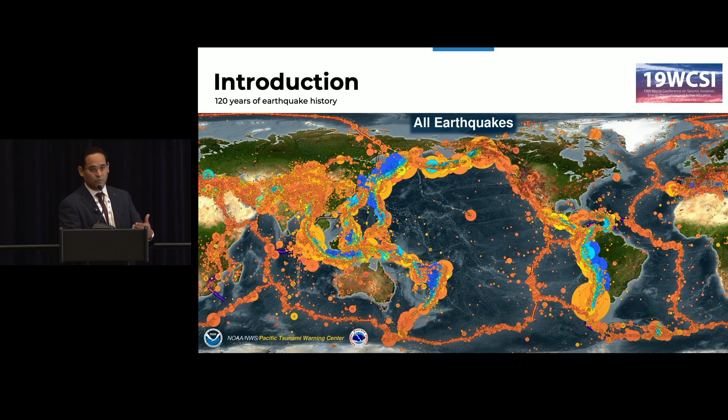So I'll go through these projects, not from the very technical side - I have the details of all the projects, if you want, please let me know. But in the time we have, we're just going to look at what type of bridges, what type of structures, and the way they have been solving these projects.

Of course, these are the most popular technologies. Fortunately, in Mexico and Latin America in general, there are plenty of manufacturers now providing solutions, which is also good for competition. I emphasize this point because cost matters for Latin America. It's a region that doesn't necessarily have the means to use technologies in the best of our abilities, but I think it's changing now, because it's a product that's more affordable for the markets, and I have some evidence of that.

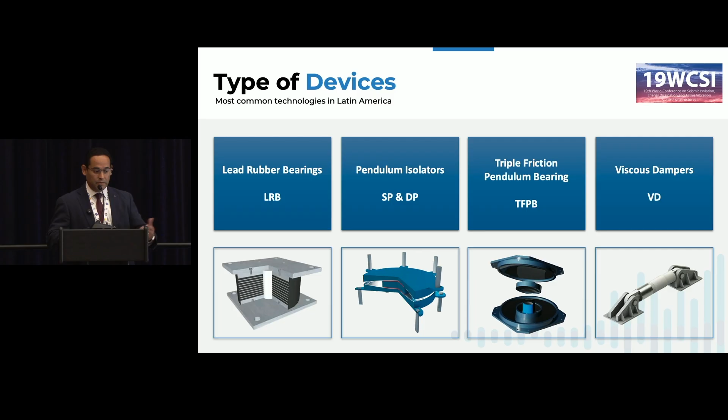There are different technologies, different companies, different manufacturers. Most of them are now in Latin America pushing for this, and it's amazing. But of course, we need to be careful in the way we do it. These are just as a reference.

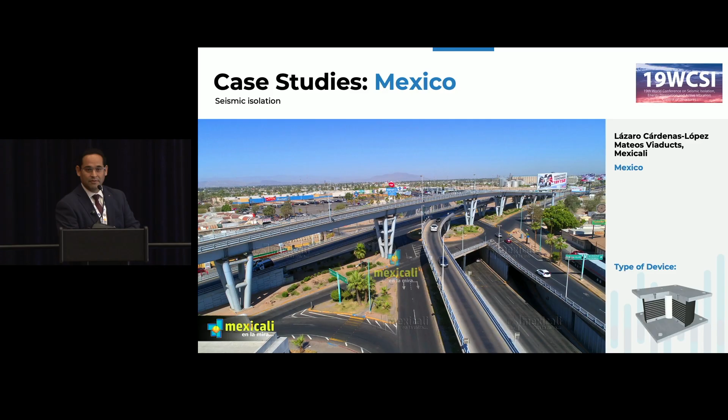Some of the case studies I want to show you - I'm going to start from the north to the south, not because I'm Mexican putting Mexico first, it's just in the north. This, for example, is a viaduct that has been there for almost 20 years in the north of Mexico, in Mexicali. It's equipped with elastomeric isolators. It's been there for a while.

There have been some issues in terms of seismic joints, not only the expansion joints, but the proper joints for seismic isolated bridges. I think it's a topic we need to be very careful about because we lose continuity of the operation of the structure if we don't have proper joints. Sometimes we neglect that from the actual design, and it's important to keep this in mind.

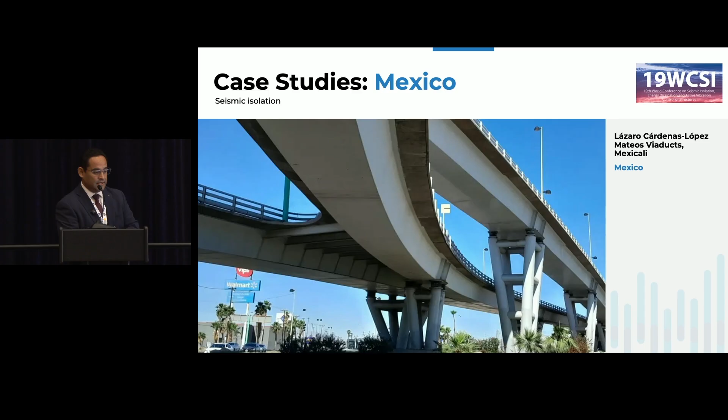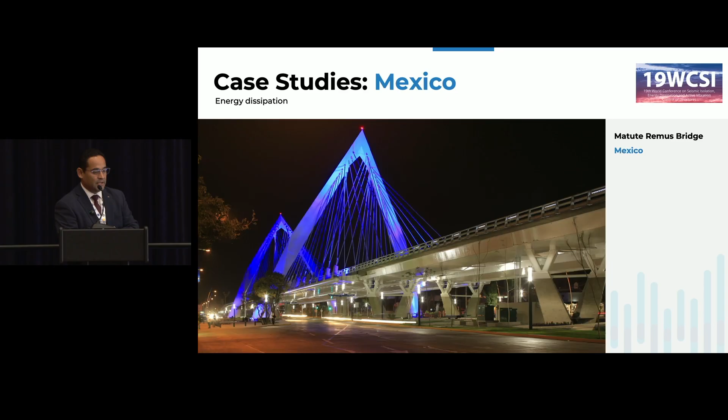This project has a little bit of an issue. There are other projects like this in Guadalajara, a big city in Mexico. This one is equipped with dampers for quite some time. You can see a little bit under the structure, the four dampers connecting the superstructure of the bridge. It's quite interesting, a beautiful bridge in the city. Very few people know it has dissipation devices underneath, but it's quite an interesting application, again in a beautiful setup.

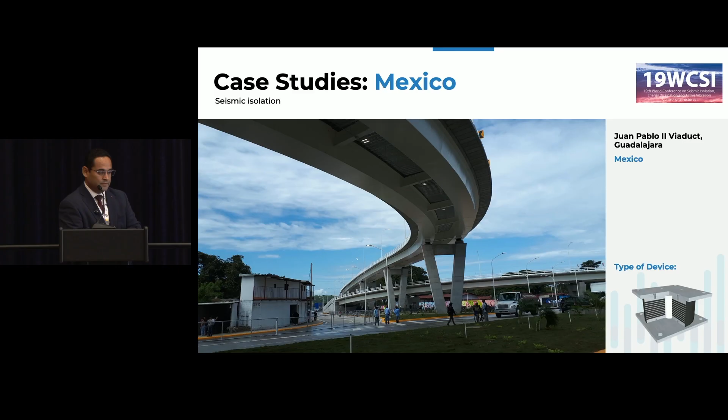Another similar bridge, also in Guadalajara, very similar to the one in Mexicali, also with elastomeric isolators, steel structure, as you can see. Now the piers are concrete, but more or less in a similar path as the other one. You see a little bit there also the devices.

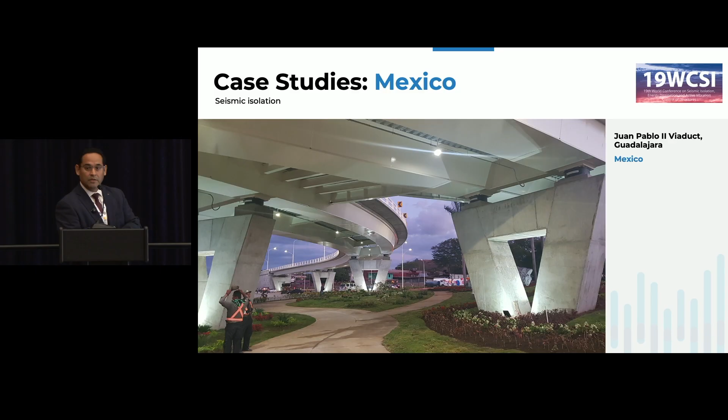Guadalajara is at the moment not the place—actually it's happening quite often that they think they don't have that many earthquakes. Probably you've seen that around the world a lot, and they do have earthquakes, but they don't remember that well, unfortunately. But they do have seismic isolated viaducts there.

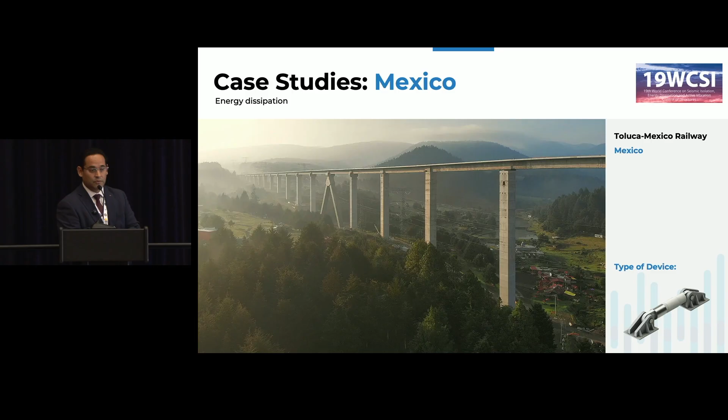Now, with the introduction of the railway industry in Mexico, which has been left aside for many years and is now being pushed by the actual government, we have viaducts like this for railway bridges, and these are equipped with energy dissipation devices, which are quite impressive. You'll see the picture there. So this is now another reality in Mexico.

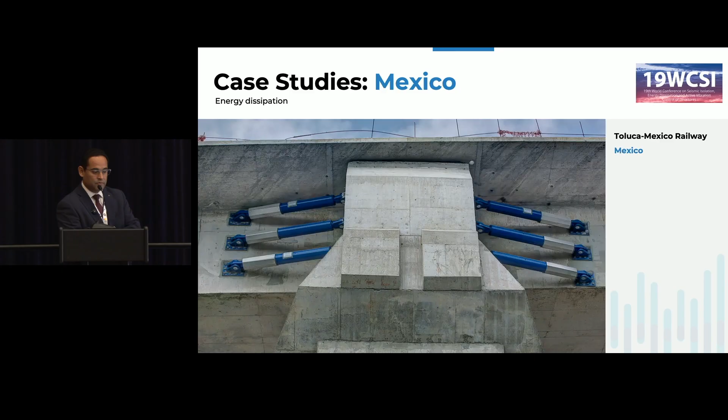Now, of course, it has a lot to do with the globalization of knowledge—a complicated term. Many of the companies designing these viaducts are coming either from Europe, the US, or Canada. So of course the know-how exchange is happening, and the manufacturing capabilities come from other countries for these kinds of devices. But now it's a reality in Mexico, and it's happening more often.

You see there the sizes of the devices—it's quite an interesting project, quite impressive, for a country which is not so familiar yet with devices, but it's interesting that we're jumping into that now. Especially in the previous presentation, you saw the importance of testing. That's when Latin America, and everything you've seen here, becomes a bit of a challenge because we don't have a proper testing facility in Latin America yet.

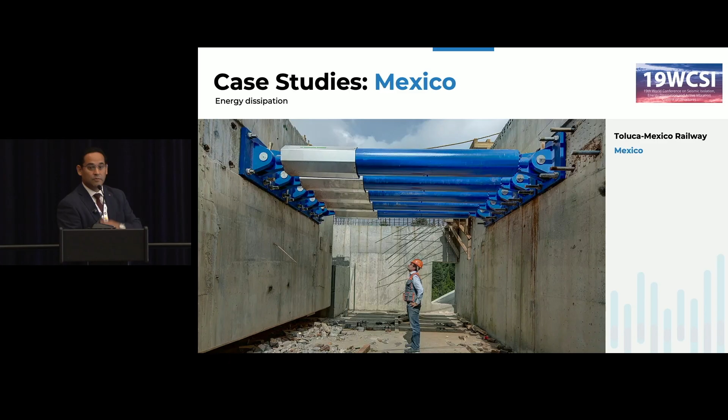So all the projects you've seen here, most of them have been tested in Europe or in the US, and that's normal—we can afford it at the moment—but the reality is we need to have in-house capabilities in our countries to properly judge if we're doing things the right way with the devices.

Another project, this is a precast structure. It's a viaduct in the city of Puebla. It has 1,400 elastomeric isolators, type LRB. So it's a massive project, quite long—13.5 kilometers. It's quite an emblematic structure.

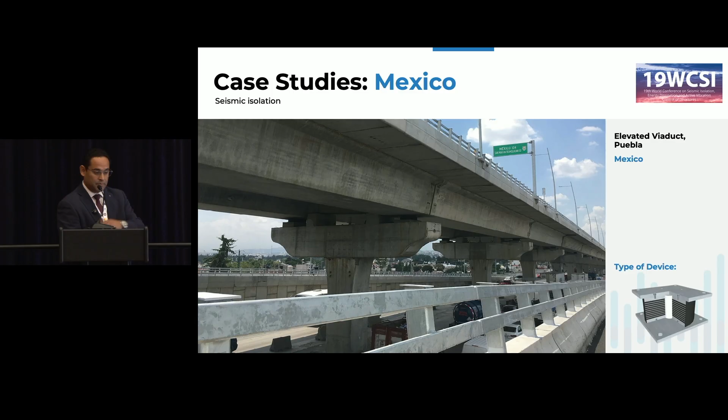Again, there are many things that need to be checked, but in principle it's working in a city that requires this. We had an earthquake in 2017 in Mexico that reminded us there's plenty of things to be done. The structures with seismic isolation or energy dissipation in Mexico City at that time performed extremely well during the earthquake. That's another reminder that these technologies work, and work well, and we need to continue properly with the proper studies, developing their use.

You see some of the pictures—that is quite long, again 13.5 kilometers, quite a massive structure. There you have another view of the viaduct from the top.

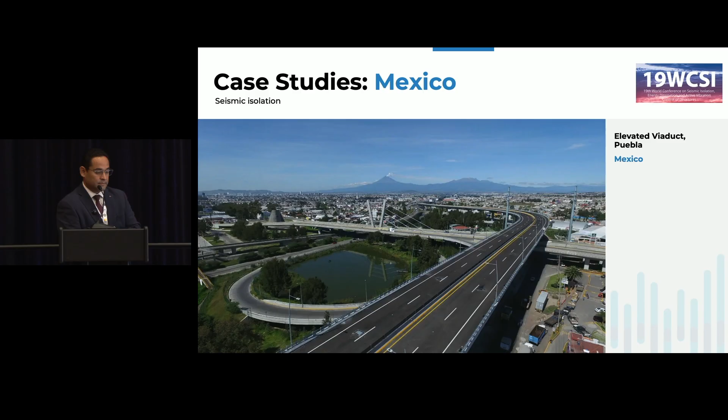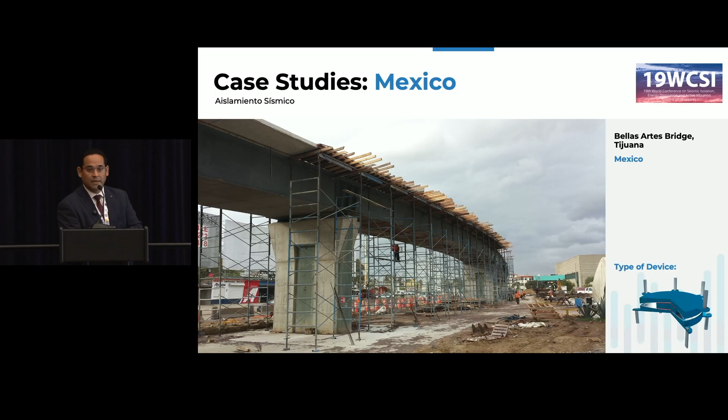And one more—you saw some big bridges, but I always want to emphasize that we don't need to focus only on big bridges. I was so surprised that Caltrans is also thinking now about having this focus on normal bridges, not the fancy ones, not the big ones, but the ones that serve the most people in the cities. And now it's happening. This bridge is in Tijuana, the city next to the US, and they have this overpass, a steel structure, now equipped with pendulum isolators.

You see a little bit there the pendulum, with special care on the seismic joints. They focus also on the proper joint that will allow the movement. If I recall correctly, the movement is about 300 millimeters in any direction. Plus the fact that you have a pendulum, you will have some vertical movement. So you need to account for that in the proper joints, and this is something important to keep in mind.

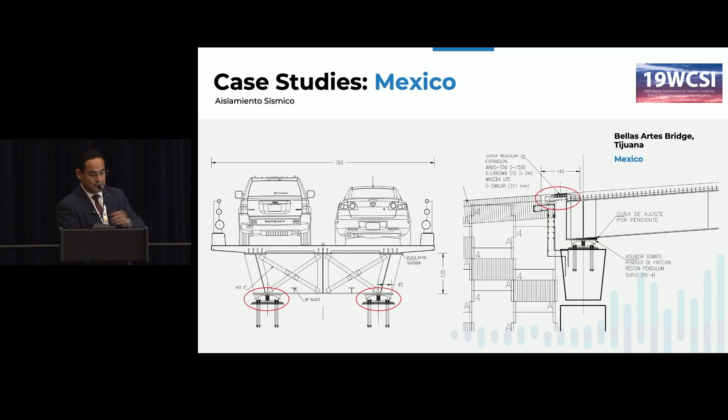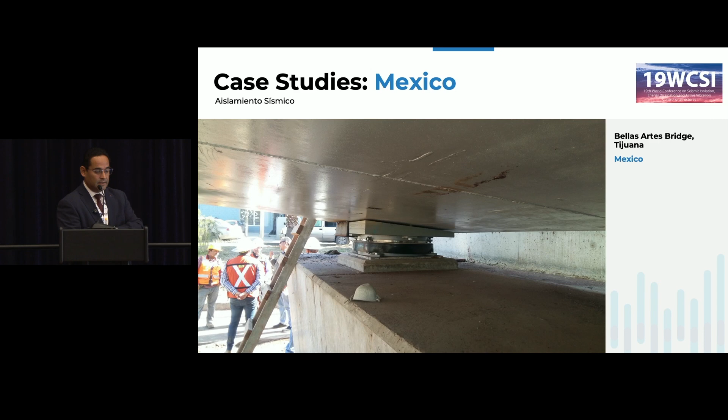Some of the pictures of the joints, which I think is important to always consider because it's not always the case. There you have some pictures. This is a very small bridge, nothing fancy, and it already basically proves that you can do this kind of technology and afford it for this application. So that's the bridge, the overpass.

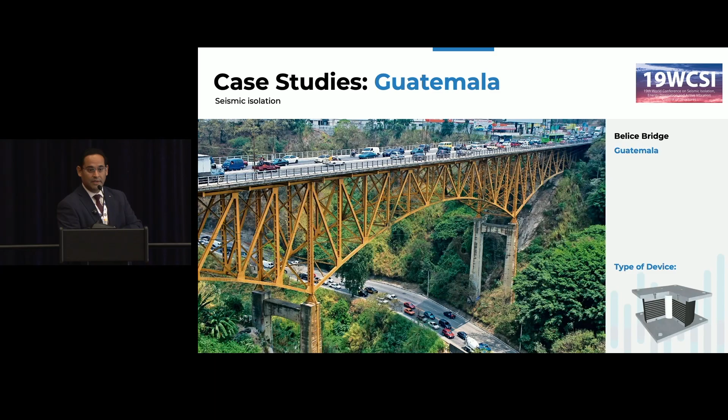Guatemala is also working on seismic isolation. This is one case of a rather not-so-young bridge. It needed to be retrofitted. They did the work, and they actually included now elastomeric isolators as a way to improve the performance. You will see a little bit of the work there. I cannot really go so much into detail because of time, but you see there where the isolators are. They have these steel elements that are now attached underneath the superstructure to control this.

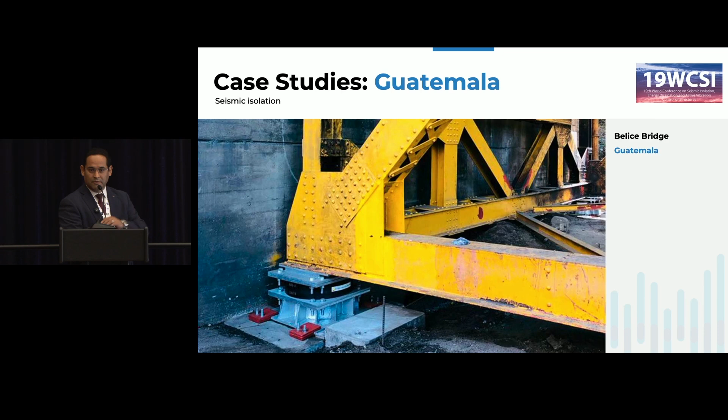Here, a lot of questions come into mind, especially the space around. We have to be always careful about these things, but now it's a way to improve the performance of this structure. This is the Belice Bridge in Guatemala.

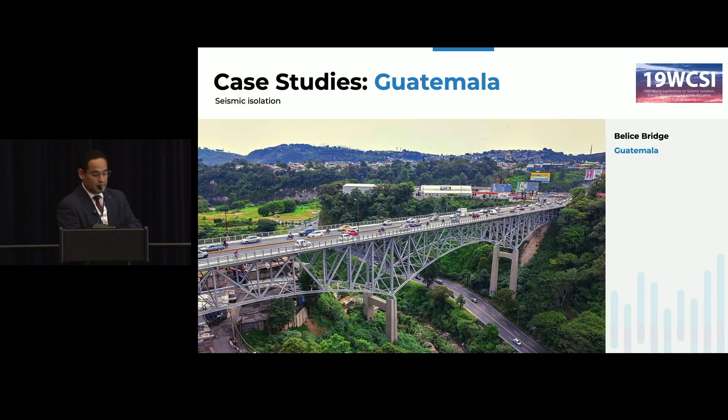And the last thing I know is there are some issues about some pounding, so there might be a need to check a little bit the space around, not even for earthquake conditions, but even service. Another interesting application in Guatemala, they have plenty of these truss bridges that you see there.

They are mostly emergency bridges that are now left there, and they use them conventionally, but they are very old, and they don't have the means to do a lot of the work. But the interesting thing they are doing is building these towers. The rehabilitation process is through these concrete structures, and then they put cables that now basically support the whole superstructure.

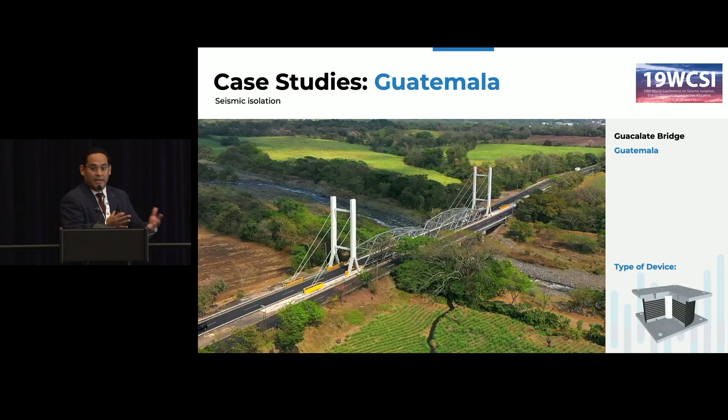The interesting thing is they never stop the traffic. They have to do it basically because it's the only thing that connects these areas in this part of Guatemala. So it's quite a challenging process.

This is one of them, the Nahualate. This is still in progress. Similar process - you see how they work on the towers, and then they basically hang the bridge. It's a sustainable way, let's say, because you can't demolish it and everything. They don't have the means at the moment, especially for many other reasons.

But it's a topic, and they have found this solution, which also includes seismic isolation on the connection with the substructure. But again, the implementation on an existing structure with not proper spacing could be a challenge, so that has to be taken care of properly by the design team.

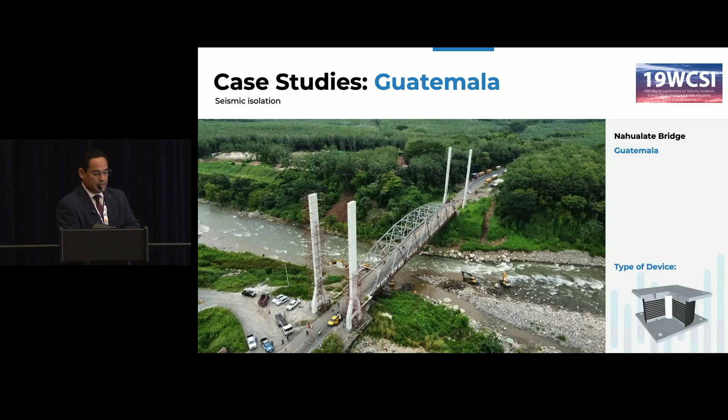And of course, this is also quite encouraging - not only are existing and deficient bridges being improved now in terms of performance with isolation, but also they are now creating new bridges, like the one you see there. It's now in progress, a structure also with elastomeric isolators, as you see there. And it just shows that these countries, we don't have the strongest economy, we don't have the strongest means, but if you consider the benefits and compare to the conventional structure, it actually makes sense now, especially since it's more affordable because we have many suppliers basically in the market.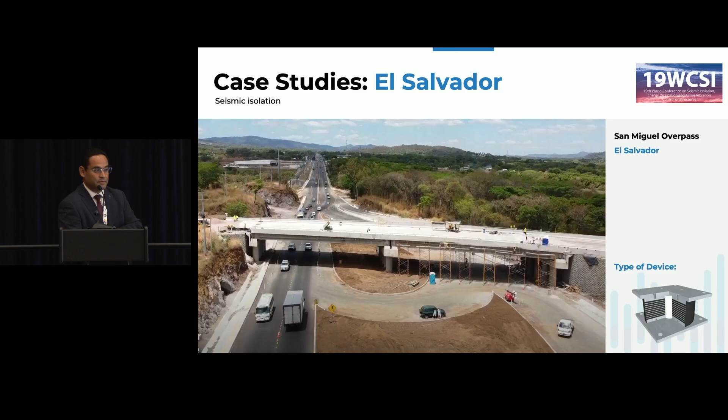And even though for many of us it could probably not be the case, it is for them. It's not well developed in terms of infrastructure, so it really makes a difference, and the fact that they are isolating these structures also means a lot. There's also another project in El Salvador, also a new structure. You can see there they are improving in many ways, not only structurally speaking, but also architecturally speaking.

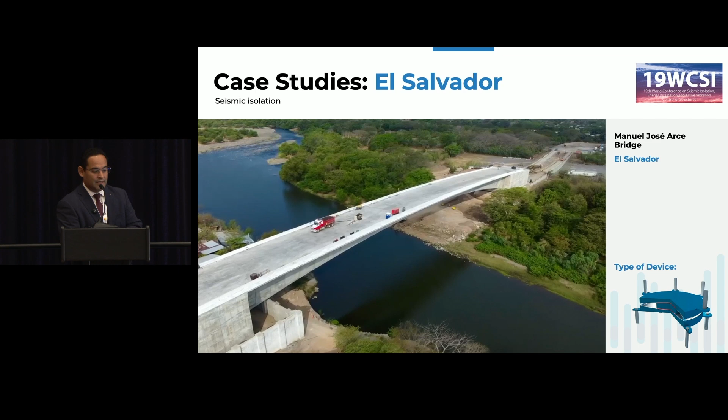It's quite interesting what they are now aiming for. I want to emphasize this one a bit more because it's from Nicaragua, a country that, economically speaking, is one of the less strong countries in the Americas. They're really having a hard time in many ways, and even though this is complicated, they are now working on seismic isolation as well.

You probably remember that in 1972 they had a terrible earthquake that destroyed most of the city of Managua, which was a vibrant, growing city with a lot of buildings. Now if you go to Managua, it's completely flat. No one is building anything because they are just afraid. Now they are building for the first time some viaducts, but they won't risk it.

So now they are going for seismic isolation in order to have the level of performance they require, because even though it was 1972, they haven't forgotten. They still remember it clearly.

These are two viaducts they built about 10 years ago, equipped with elastomeric isolators. I really respect the fact that they also went for proper seismic joints, proper modular joints in this case, which allow movement. The picture is 45 centimeters in any direction, quite a bit of movement, and the joints are ready to take it without damage during an earthquake. This is essential, because it doesn't matter if you have an amazing isolator—which is always a challenge—you also need to be able to allow that movement.

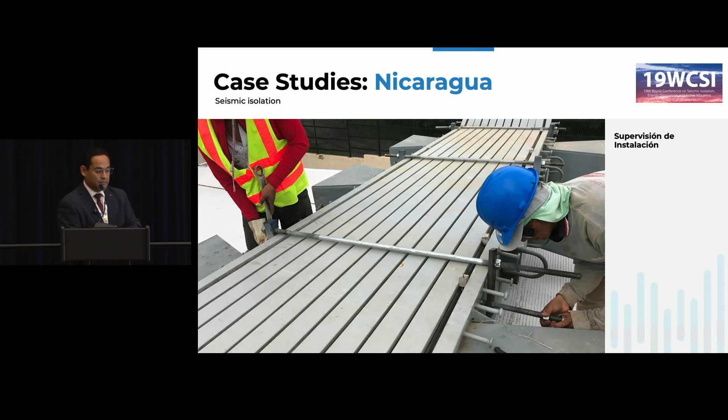They did that about 10 years ago, and now they are just finishing two more viaducts, completed about a month or two ago. We've been part of that project, especially supervising the whole situation. As you can see, it's a precast structure—they're jumping into new methods of construction, and using elastomeric isolators. In their country, they're still very much into elastomeric isolators.

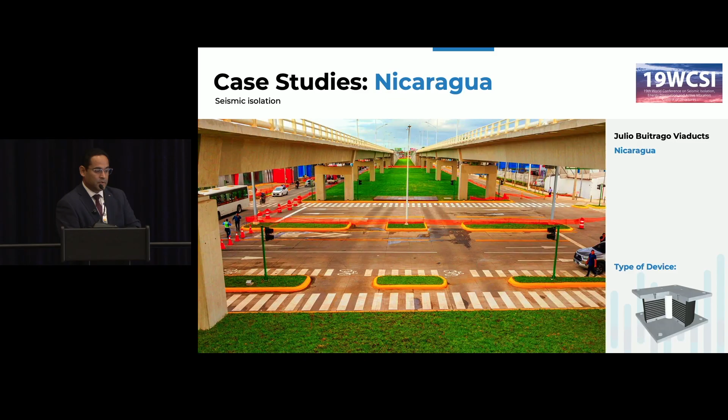They don't want to touch the pendulum for some reason, which is absolutely respectable. But you can see they are now moving into these two viaducts, which for many of us probably aren't that impressive—but for them, it's the most impressive structure there is in Managua at the moment. They are going for this solution now because they know.

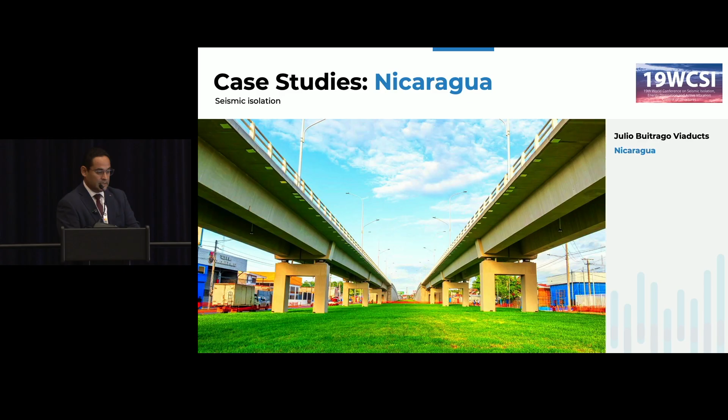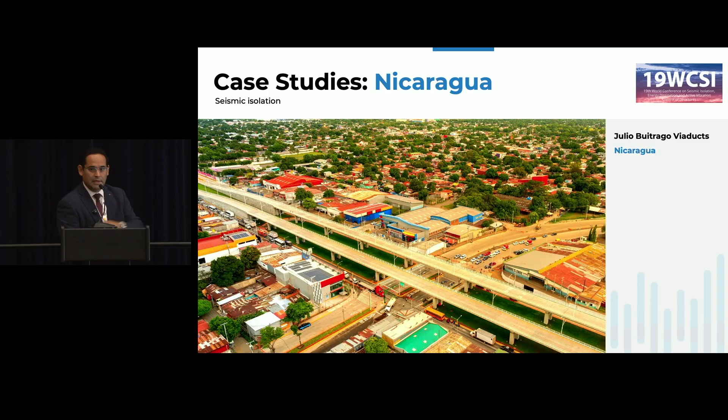I put this picture just so you get a glimpse of what Managua looks like. As I told you, it's just flat—no one daring to make a tall building because they're really scared about earthquakes. So I think the right approach is to do proper engineering and try to keep it that way. Again, that's Nicaragua.

And of course there's another country, Panama, which has a little less trouble economically. They're doing well, and they have all these bridges because of the Panama Canal. This is the third bridge crossing the channel, equipped with a lot of devices—spherical bearings and so on—and for our purposes, viscous dampers, massive viscous dampers as well. I'm happy to share some details of the devices.

It's quite impressive. Panama, within Latin America, is kind of a different case because they have a strong relationship with many countries and a strong economy from the canal's economic activity. These projects are now equipped with this technology too, though I have to say most of the engineering here comes from another country. Most of the other projects you're looking at are designed and worked by local engineers with local capacities, which is essential for our region to jump into this properly.

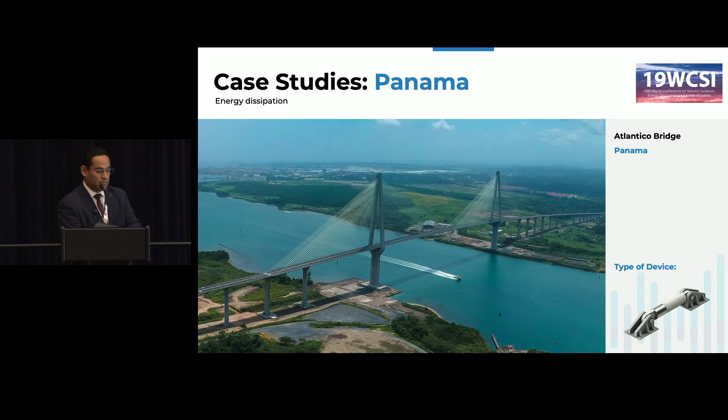Okay, so now we go to Colombia. My wife is from Colombia, so I have special appreciation for the country. We also have quite interesting structures, like the Yarumo Blanco viaduct equipped with pendulum isolators, and they are now also retrofitting a very important number of existing bridges.

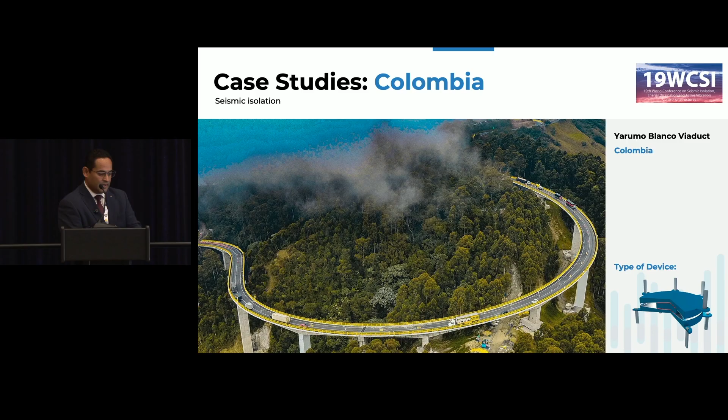They are very fond of cantilever bridges, as you can see there, and now they're equipping these existing structures with seismic isolation technology, which is quite a challenge. Normally the natural expectation is to have the isolation system on top of the piers, below the superstructure. But they're working down basically to the foundation, creating a whole new base for the seismic isolation system.

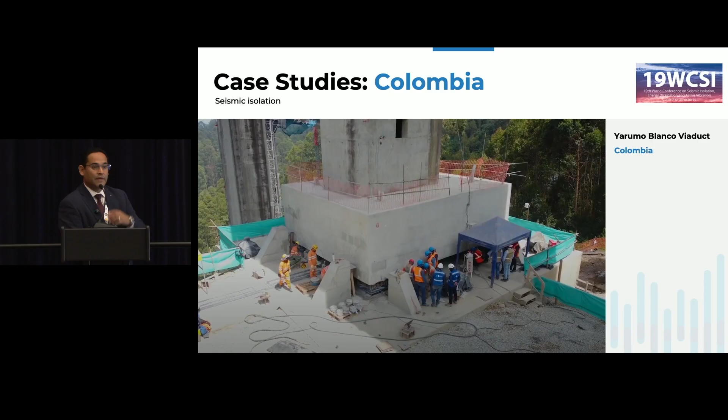I have to say I'm very impressed and really admire the work of the company Pedelta, from Juan Sobrino. They have a very strong presence in South America, and they are doing a very strong push for seismic isolation with a very creative way to solve issues like the one you see there. What they are working on right now is basically rehabilitation of this structure with pendulum isolators. I'll show you a very brief animation so you can see how it works.

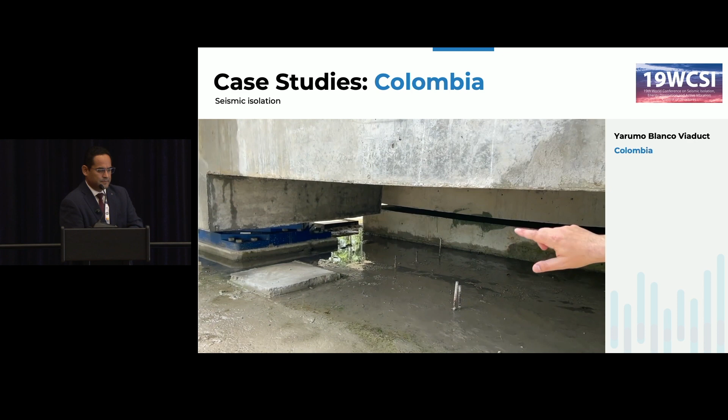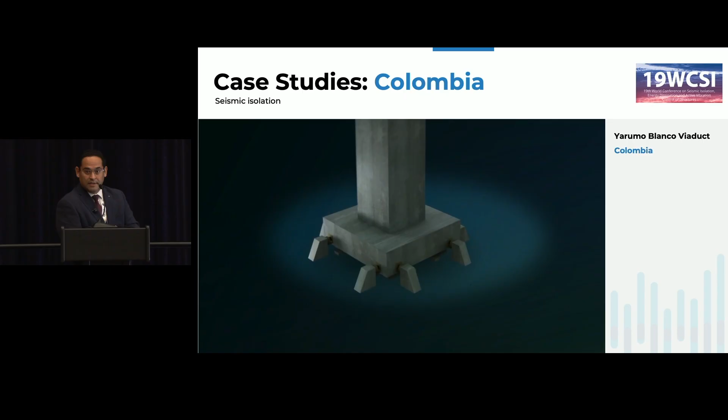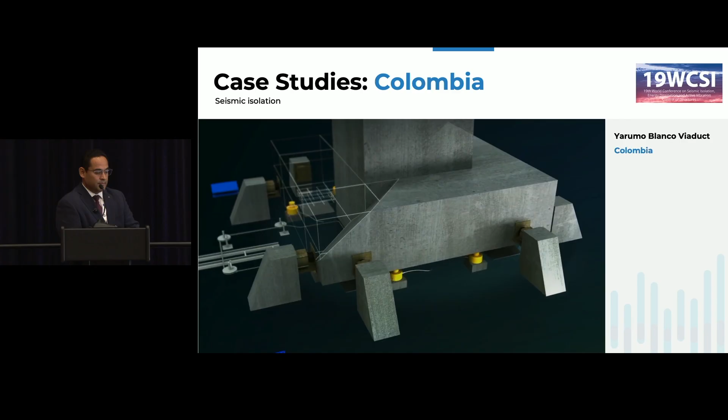So you see there how they work basically on the foundation. They create the base, so it's quite a bit of work, quite a bit of lifting as well. You saw a little bit of the whole geometry of this structure. They work underneath, basically lift the whole structure, and once lifted, they put in the new pendulum isolators, which also have some vertical movement that has to be accounted for. That's how they are now rehabilitating a lot of concrete bridges in Colombia. They have plenty of the same type, so they are working quite intensively now.

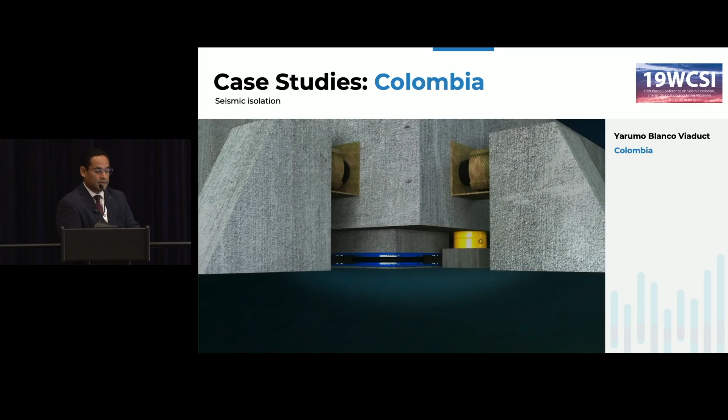This is one of the pictures. We have another viaduct, also very similar. All of this work is basically connecting with the foundation, putting in this system with pendulum isolators, which is not an easy task. It requires a lot of expertise.

And this is the important part of this. I'm presenting Latin America as a whole region, but we have plenty of countries, and even though we're very similar, with similar language, we speak a little differently. But the reality is we also need to share this knowledge. We need to know that Colombia is doing this, because maybe in Mexico we can solve an issue because of that, or maybe we did that in the past and are finding out there are some risks associated with it. So sharing this knowledge, which is of course the aim of this kind of event, is essential for us to know what's happening around.

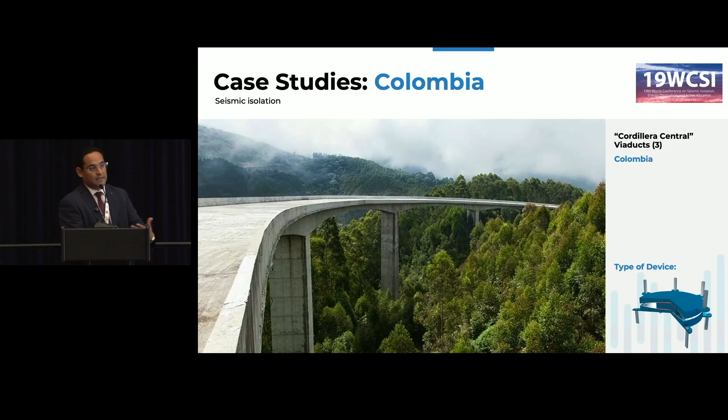And if you guys might be using this kind of system eventually for your countries, or detect that something can be improved, please let us know so we can continue improving. Some other viaducts - all of these are different. They look similar, but these are different locations, different structures. So they are working strongly there.

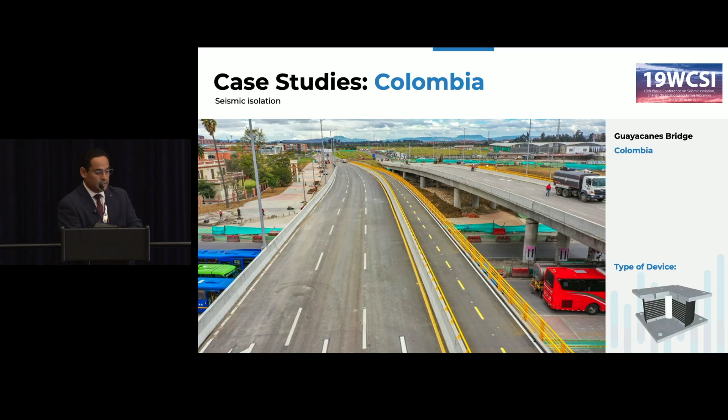They are also working now in the city of Bogota. There are some structures also with seismic isolation, especially these viaducts. They include elastomeric isolators. There are now some local manufacturers basically supplying this kind of technology, which is great, as long as we have the proper way to measure their quality, their performance. I think that's where we need to put the finger now in this kind of structure. So this is one example in Bogota.

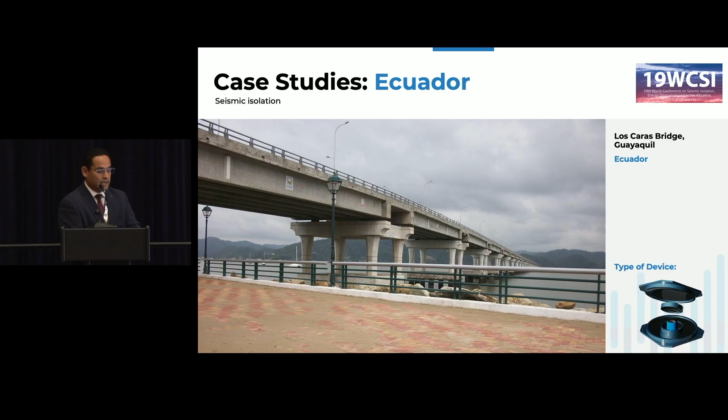Then, of course, we go to Ecuador, a little bit south. Ecuador has also done a lot in recent decades in terms of buildings, hospitals, and also bridges. You can see one of the most iconic ones here, the Los Caras Bridge. This bridge already suffered a strong earthquake, and the seismic isolation basically kept it going - that was a very nice success story. It's a really emblematic structure in Guayaquil and an amazing study case.

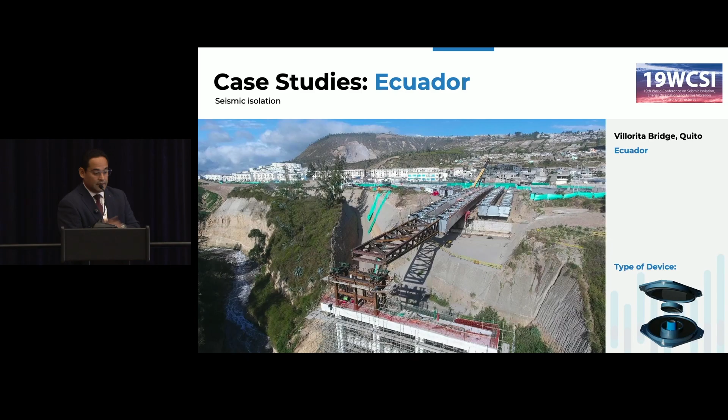But there are also some new structures coming up with seismic isolation systems as well. Here they are going a lot with the triple pendulum - it's one of the technologies now available for them. And again, I have to emphasize economically speaking, it's affordable, it's something they can actually access. I think that's the whole difference, because even though for many other countries probably price is not the biggest challenge, for us in Latin America, whenever you say technology, they get scared and don't want to hear anything. So you have to really do a little bit of convincing.

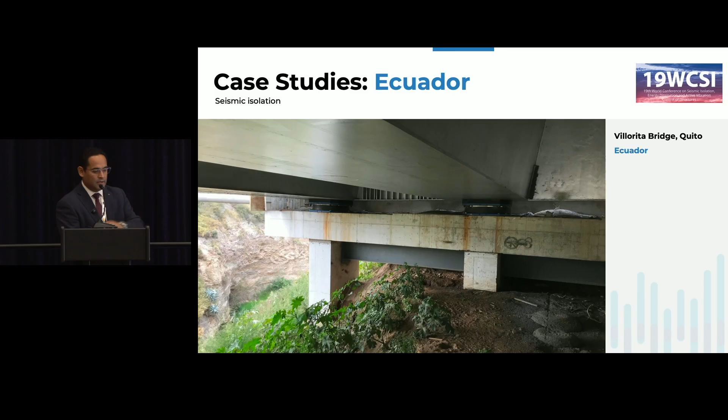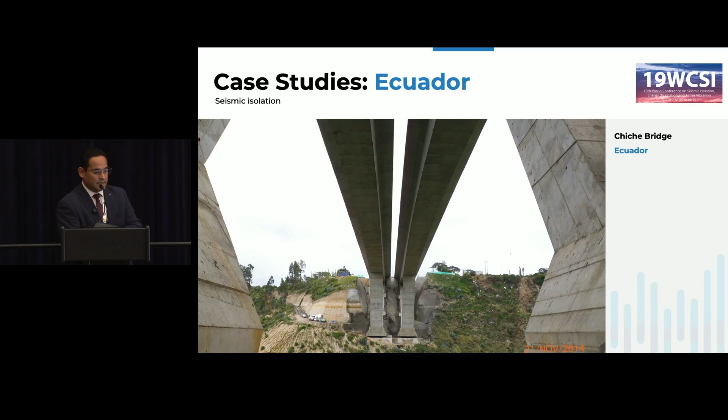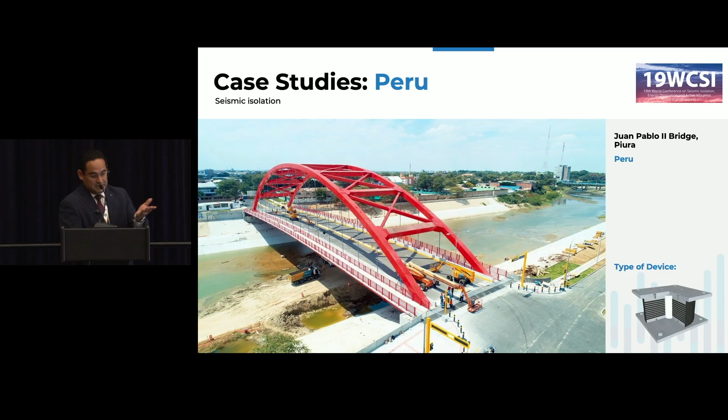And the same goes for Peru. I have to focus on bridges here, though something is happening in buildings too, which are becoming quite strong from an isolation and dissipation perspective. But Peru is also moving in this direction with bridges. These structures are now equipped with elastomeric isolators. You can see how every country has its own mindset in terms of what type of bridges they like, steel or concrete, depending on local criteria. But this is an example in Peru of structures now equipped with isolation. This is a new bridge.

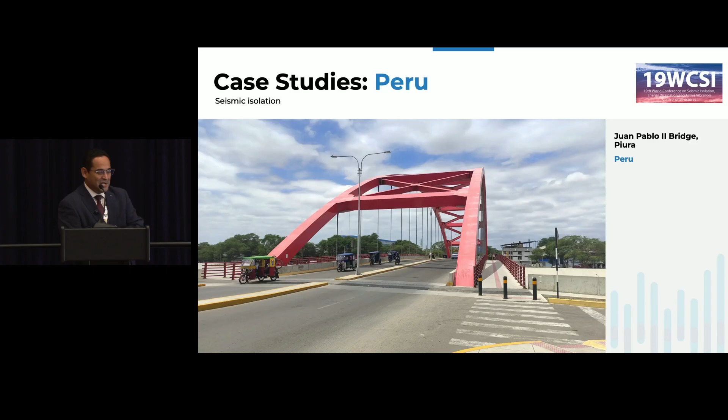Juan Pablo II, by the way, he was the Pope. There are many isolated structures with the Juan Pablo II name in different countries, which is not to be confused. But this is the one in Peru, also designed by Pedelta, the company I mentioned before, from Colombia.

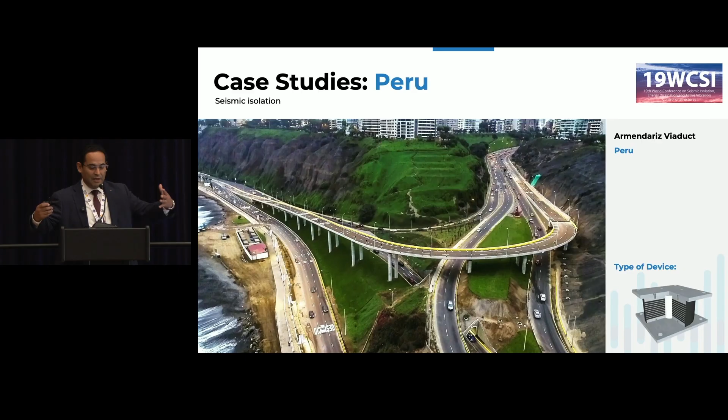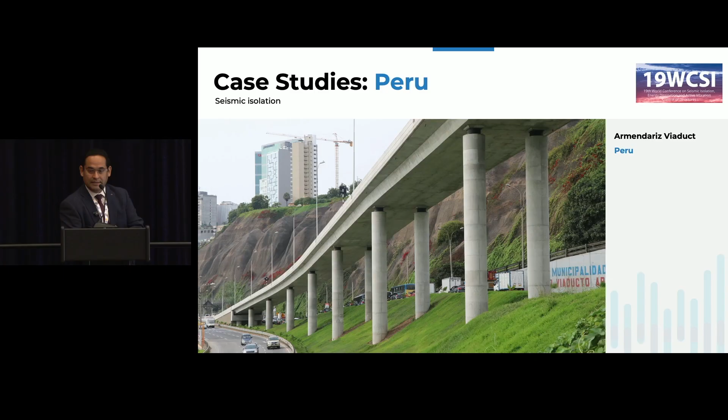It's an interesting application. As a Latin American, when I grew up looking at bridges, I always saw bridges with big piers and a lot of concrete. So whenever I see these structures with slender columns, it's not common, but we know the isolation is providing these possibilities. It's interesting because in many ways it creates more sustainable structures. You have some pictures there. For me it's impressive because this kind of section is not common for Latin America.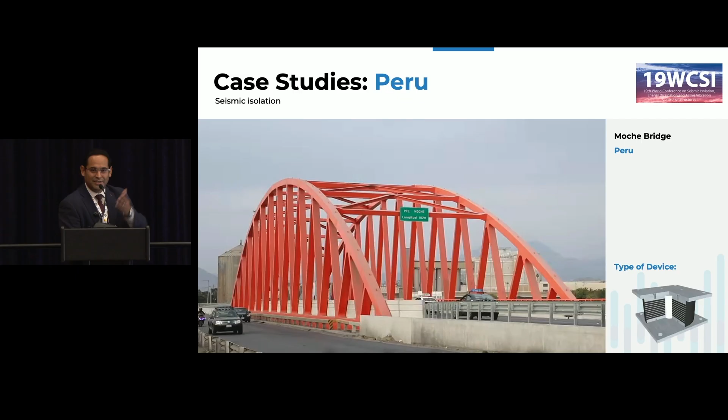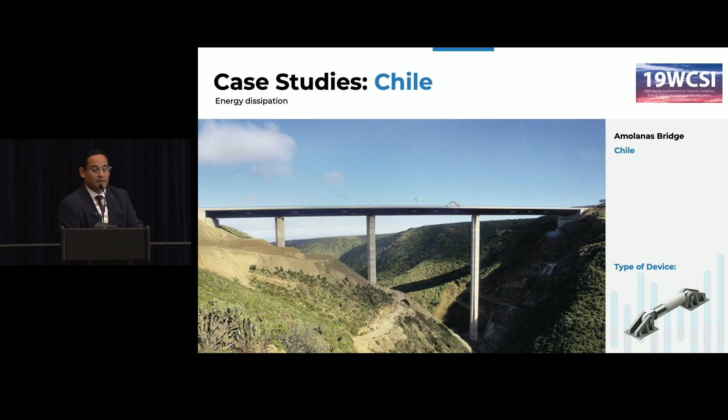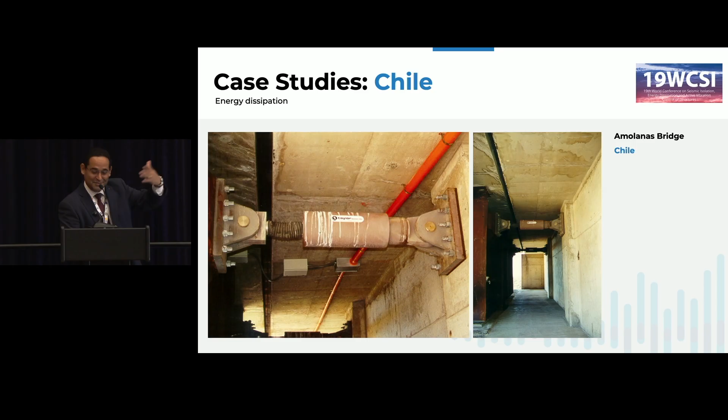Congratulations to the Chilean friends, who are doing a great job. There are other projects in Chile, plenty of them, and many people here probably work on these projects. One case in Chile uses seismic dampers, with viscous devices to control this bridge. Sorry for the pictures, those are the ones I found, they could have been cleaner, but I guess it's not an issue. It doesn't show leaking from the damper itself, I think it's something from the top, the expansion joints not really taken care of properly. Interesting applications, you can see the devices there.

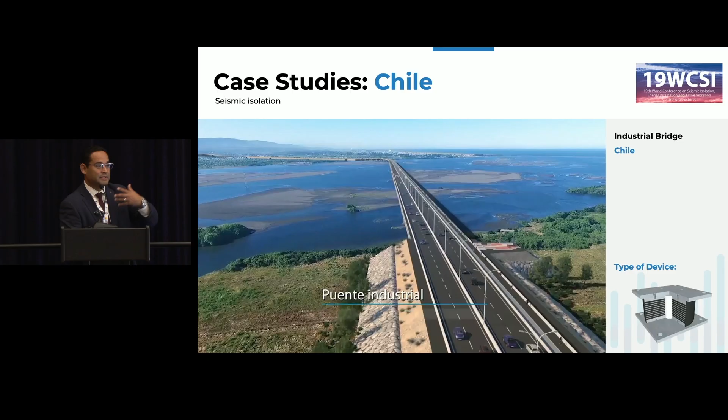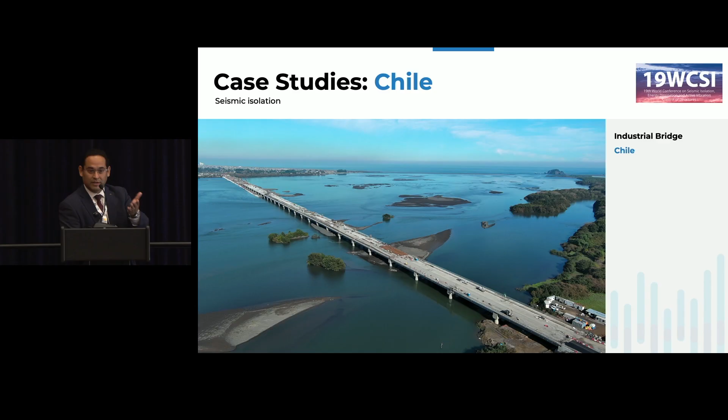And of course, Puente Industrial, I think this is also an elastomeric isolator, a massive project for seismic isolation in Chile. I'm sure there are plenty more, but because of time we cannot show many of them. Technically speaking, every single project I'm showing could take half an hour just presenting the solution and the devices, so whenever you need information I'm happy to provide it. The structure is quite interesting, I believe it's the longest bridge in Chile, and you get a full picture of the whole project.

Finally, though I don't have much information, just a full presentation of this, I was quite involved in the seismic isolation of the Chacao Bridge, a 2.7 kilometer suspension bridge crossing from the mainland to the island of Chiloé. It's an impressive structure now ongoing, and it's amazing how seismic isolation, energy dissipation, and many devices are involved, because here we have tensions we've been discussing in some presentations, and quite important ones. We had a requirement of testing for uplift forces of up to 3G, which was rough, so we went down to 2G finally.

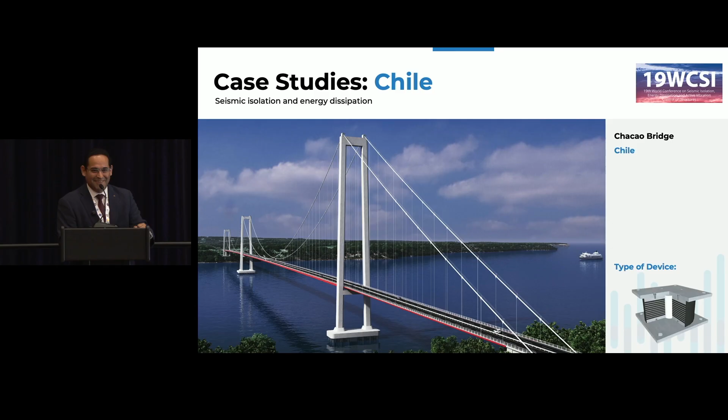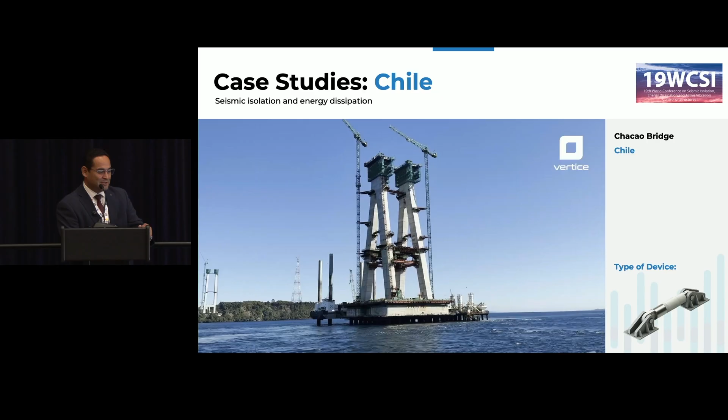Then I left the company and I don't know what happened, but I'll try to find out and let you know. This is an impressive structure that is happening, you can see where it is at the moment, in its own videos, so it's ongoing. It has taken time because it's a political project, similar to the Messina Bridge situation, but this one is ongoing and happening. It's going to be isolated with energy dissipation and hold-down devices because of the uplift, a really interesting application of technologies. Some other images show how it's looking, it's a very rough environment, so a very interesting project to know more about.

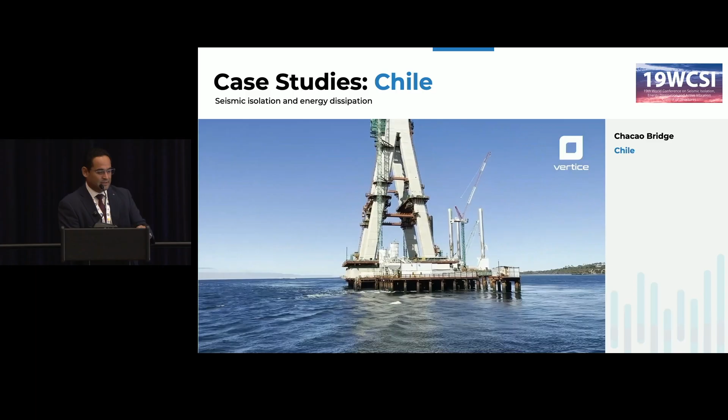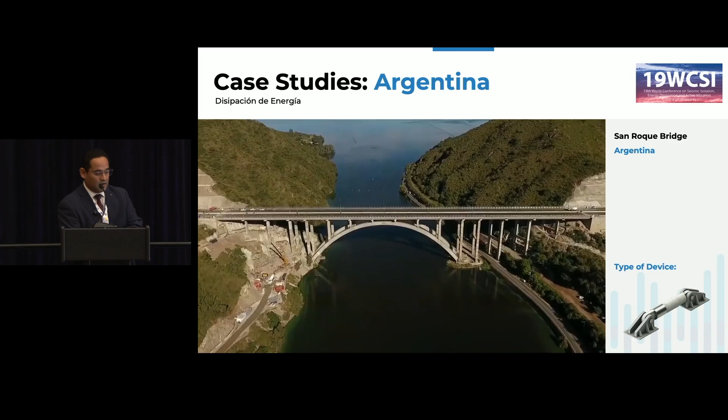And of course, finally, Argentina, which doesn't seem to be the place to be worried about earthquakes—they do have a border with Chile, where they get a lot of the seismic activity from that region, and they sometimes need isolation or energy dissipation. In this case, this bridge is a concrete structure equipped with viscous dampers.

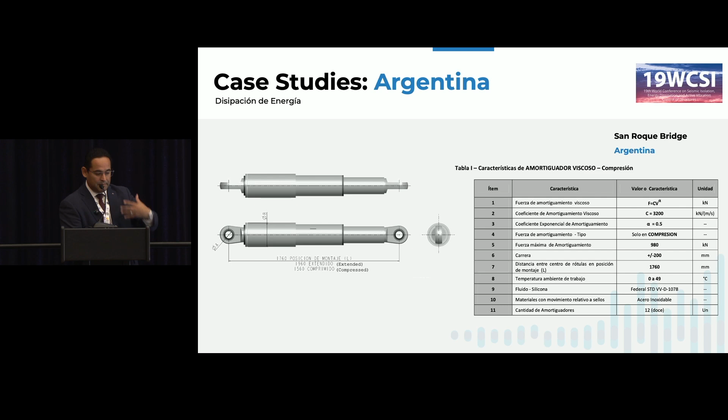And here I also want to mention the importance of education. Not only these events, but the fact that in our universities we teach these technologies to our students—we start to create the spark of why thinking about isolation or energy dissipation is fundamental, because that's what really makes the difference. When we got this project, they sent us everything already done. They were so clear about what they wanted, so it's not that you have to do something special—they already have that know-how. That know-how is what I think has made the difference in Chile, in Peru, and now in Mexico. So getting prepared and ready to understand all these concepts and apply them properly is fundamental.

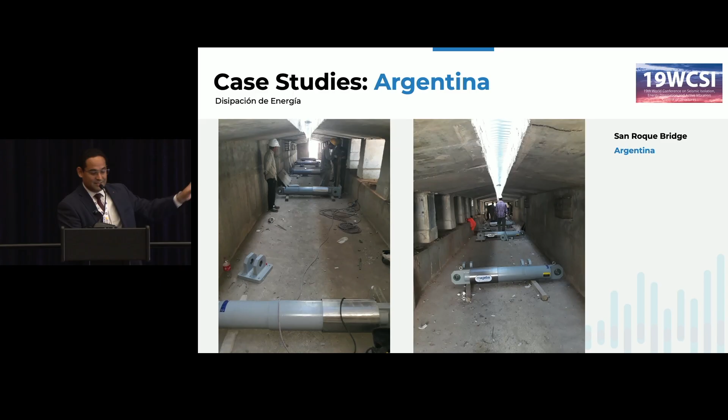So, some pictures of the project. Very interesting one—you see there the dampers are not as big as the blue ones we saw before, but again, an interesting application.

And just to close, finally, the use of seismic isolation and energy dissipation in Latin America is a reality. It's happening, and it's encouraging, but it's something we have to take very seriously and be careful about. There is still a lack of knowledge we need to fill in order not to have any situation. Of course, we now have local expertise, and we need to strengthen that part. We have a lot of international competition, for sure—a lot of companies now supplying these technologies coming down. But, of course, we need to have local production.

We've seen that in countries such as Turkey, where once they have local production, the industry boosts. I think that's the fastest way to have these technologies applied to as many structures as possible. We also have to be very careful about local regulations—in many of these countries there are none. In Mexico, two years ago, we had for the first time regulation for seismic isolation in buildings, but we have nothing yet for bridges, and that's a reality in a lot of countries. As you've seen, the variations between the codes you take as a base change a lot, so it's important we start to develop those things.

Very important: testing capabilities are essential for developing these technologies properly and safely. I just saw the presentation from Japan, and it strengthened that idea—especially in our countries, if Japan is having issues, we need to be even more careful for the many other uncertainties we can add into the mixture. So, building local capacities and local manufacturing capacity is essential, but with the highest standards. With seismic isolation, we cannot risk it—we cannot just let manufacturing go loose because companies want to. We need to be very careful about that, and that's where regulation also makes a big difference.

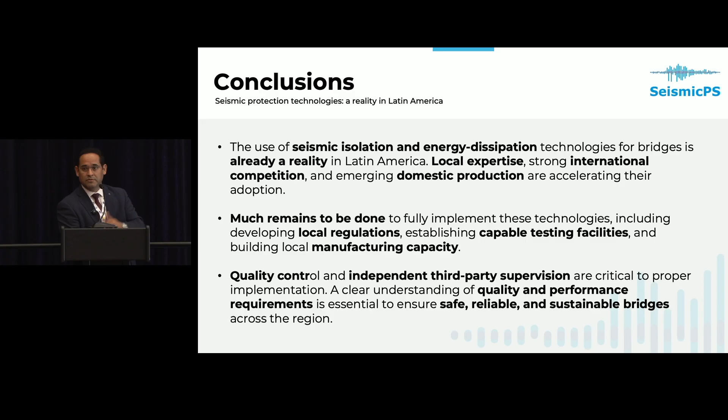So that's a little bit of the glimpse I wanted to give you about Latin America. Thank you so much for your patience.